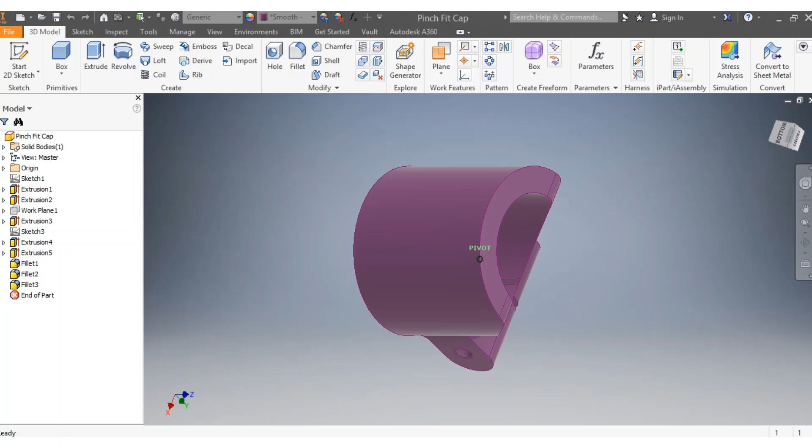We've been given this pinch fit cap to draw, and first we need to know our dimensions. Our dimensions are in millimeters, so you come back here and say new sketch, metric, standard millimeter, and then go create.

Once here, you can start by drawing your guide lines. That's my first line, which is vertical, and now I'll draw my horizontal line. I need to make sure the horizontal line is perpendicular to the vertical line, and drag it back there.

Once I have those, I'll start with the circles. I need my first circle, now my second circle. Now I add dimensions: that one needs to be 80 millimeters, and the second one needs to be 55 millimeters.

Once I have this, I'll come for the rectangle. I need my first rectangle there, and my second rectangle here.

Now I need to make sure about the dimensions of my rectangle. That one needs to be 65 millimeters. And from here up to there, that needs to be 32.5.

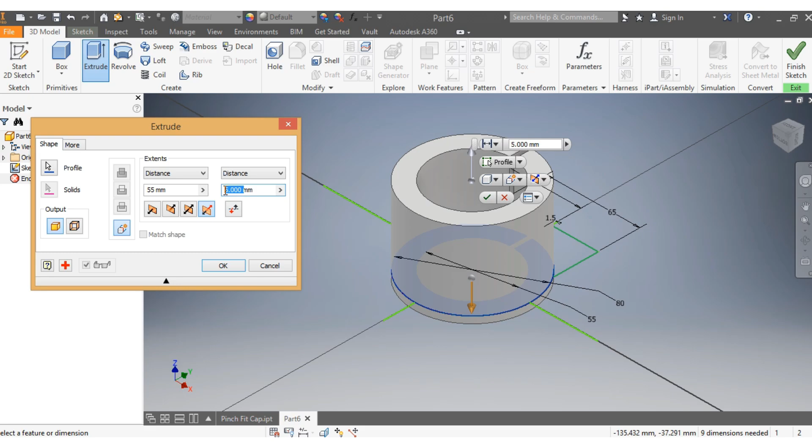So now I say extrude, I come here, and then as per my drawing, it needs to be extruded closer to me by 55 millimeters and far from me by 5 millimeters. That is correct, so I come back there and say sketch visibility on.

Once I put the visibility on, I now need to extrude. I want to extrude that spot there and the spot here by 25 millimeters, and that seems to go both sides of the center line.

Okay, which is great. So now I need to change my drawing plane. I go for the XY drawing plane, then I want it to go by 0 there. I say okay.

Then I come here and say new sketch, and again slice graphics. Once I say slice graphics, I come to the side here. So what I'm going to do now is start with a rectangle - I think that's going to be easier. So I draw a rectangle, and there it is.

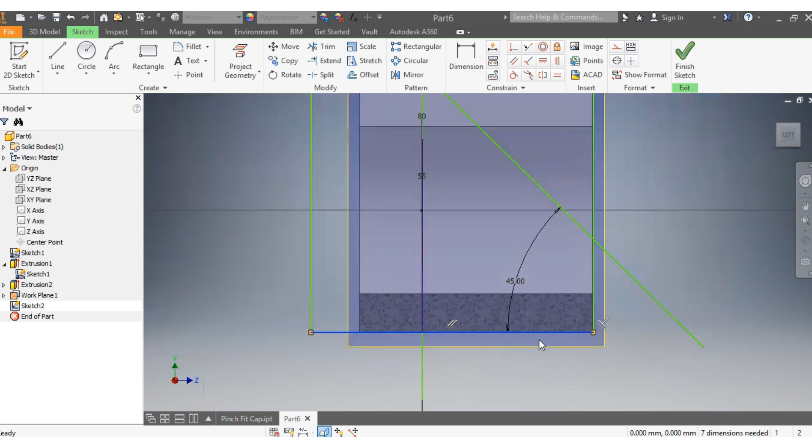That one needs to be 45 degrees, and that one needs to come there. So I come and trim this part here, trim these parts. Now I need to make sure this one there, from there up to there, needs to be 40 millimeters. So 40.

Once I have that one in place, I can come and bring this one back there, and this one as well, back here. Okay, this one back there, and this one back here. Now I can come with this other line.

So this is my line, it starts from there. It starts from here and then goes there. Once I have that one in place, I can now delete this one.

I can delete that one, I can delete this one here, and this one as well, and I can trim this part here. I can trim that part there. I can trim this part, and that part as well.

So now I can go on 3D model, and say extrude. I want to extrude this part here, that part. Let's extrude by 100. This is fine, both sides. Let's make it 200, that's safer for us. Then I want to cut it.

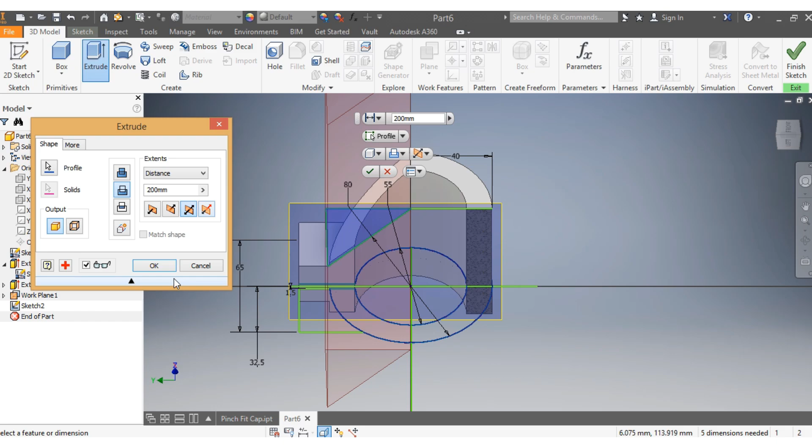So I say okay. Look how our drawing looks like now. So then I come here, and I need to have my circle.

I come here and say new sketch. So from there I start with the circle, that's why I need to start from there. That's my first circle, and that is my second circle. According to the sketch, that one needs to be 8 millimeters, 8 millimeters. And this other one needs to be 12 millimeters, 12 millimeters.

Once that is done, I go to 3D model, say extrude. I need now to extrude this part here, that part. 200 is fine. Passing through, okay, like that.

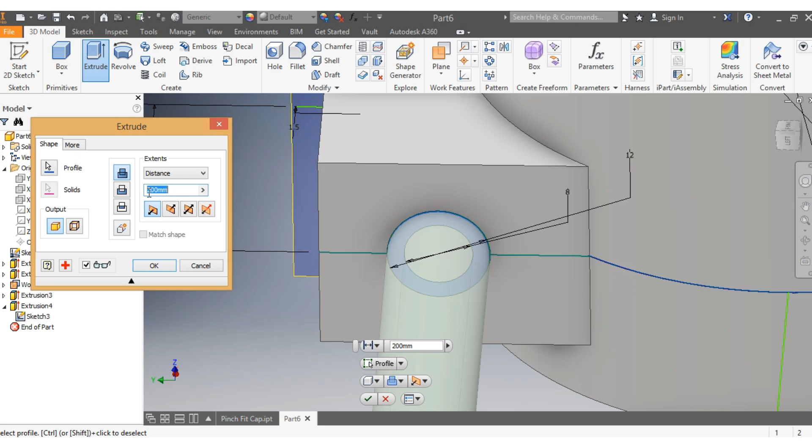I say okay. Then I come here, visibility on, visibility on. I need to extrude this part here, so I need to cut. I need to have a step there of 8 millimeters, so 8 cut inside. I say okay.

What I'm gonna do next is put the visibility off. So that one needs to be off, this one here needs to be off, the plane needs to be off, and that is great.

Now I come this side. That part there and this part here need to have a fillet, not a chamfer, a fillet of 12.5. So this part here, as well as that part, need to have a fillet of 12.5. That's great. And this one here, as well as this one here, need to have a fillet of 12 millimeters.

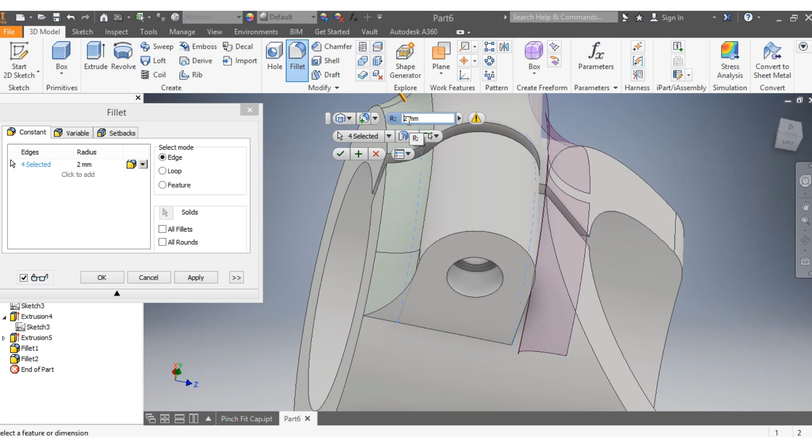So now you can see this is how it looks like. I come now to the side. I need to have a fillet there as well as there, and at the back as well. So this side as well as that side, a fillet of 2 millimeters. That's great.

Once I have that one, I think our drawing is finished. So you can see how beautiful your drawing looks like.

The next thing you can do is maybe change the material. You can put the material that you want. I can go for carbon steel. What is carbon steel? Carbon steel.

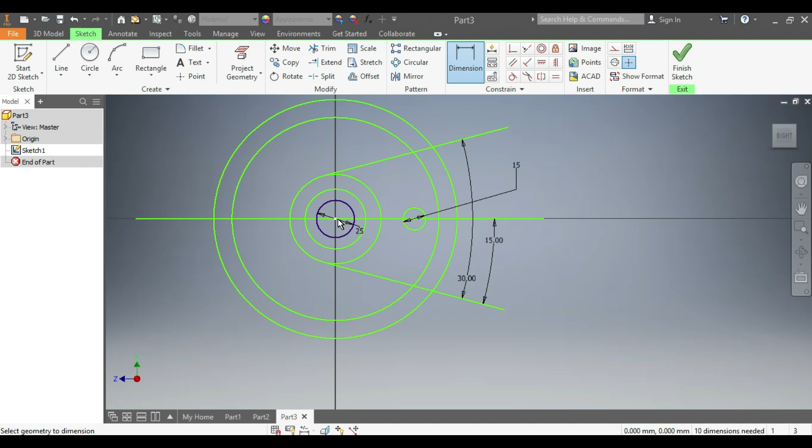So once we have those in place, what I'm gonna do now to avoid any confusion, I'll come here and delete that. You press on it, say delete, come there again, delete that one, delete this one, and then I need to make sure that from there up to there, that one needs to be 45 millimeters. And then I don't need that one as well, so I delete that one.

Then I go there, punch trim. So I trim this part here, I trim that part over there, I trim that one, I trim this one.

Once I finish with trimming, I'm gonna go into the model and say extrude. Now I need to extrude that part. That part needs to be extruded by 13 millimeters, and it needs to go the other way, the other side of my drawing plane.

So instead of punching that one, I'll punch this one here. Then I say okay. Then I come here, sketch visibility on, so I can see my drawing again on my sketch.

I go on 3D model, punch extrude. Now I want to extrude this portion the other way, plus that one as well. This one needs to go 12 millimeters. Okay, 12 millimeters, I'm happy with it. I say okay.

Then I come again, I say extrude. I need to extrude that part there by 36 millimeters. Now I need to make it visible like that. Then I say okay. Can you see that? There's your frame.

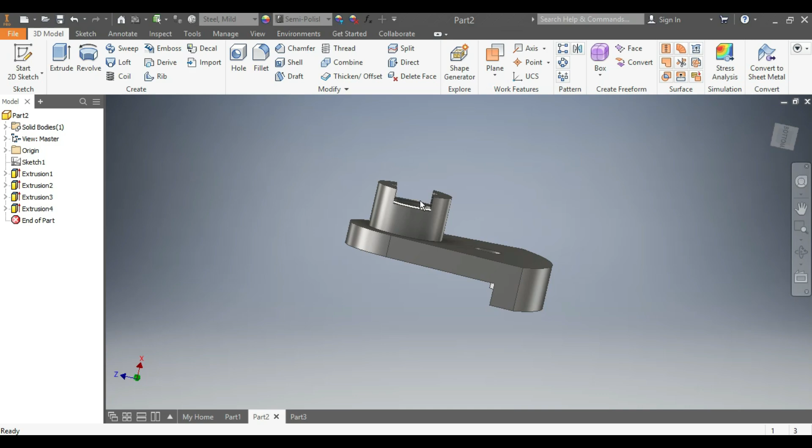So the next thing that I want is this part over here. I want these cards, do you see that? Can you see it?

So I come back here, I say sketch first, new sketch. I choose a rectangle, then I go like this. Now I want this one here to be 20 millimeters. That was close, and from there up to there, back to 0 again.

From there up to there, that one needs to be 10 millimeters. So 10 millimeters, I say okay.

Then I go on 3D model again, punch extrude. Then I want this one here to go inside now, not by 36 millimeters but by 8 millimeters. Then I say okay, now I'm satisfied with the results.

So what I want to remove now is the visibility of my sketch. I'll say visibility off, then I have my drawing. So the next thing you want now is to choose the material - I think for this one you can go with stainless steel.

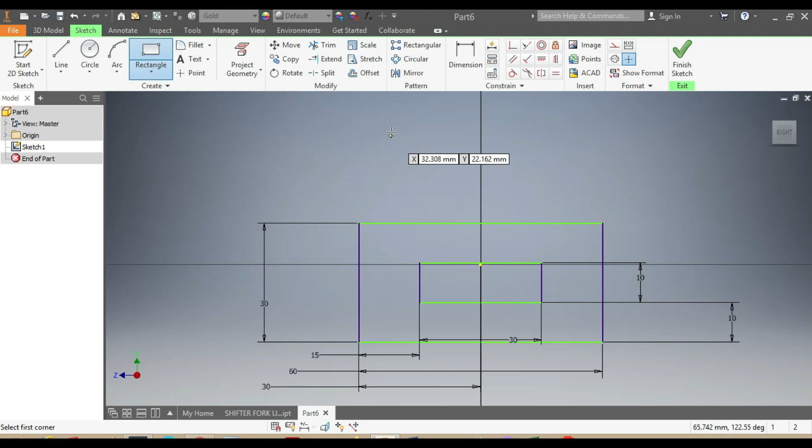Talk about this upper part, those two, right? So I'll come here, I'll draw my first leg, I can call it leg, then I'll draw my second one. Then I'll come for this small part here, the one that we're seeing here, that one.

I need to make sure that this one here is 30. And that one needs to be 10 millimeters for the thickness. And there as well, I need to have 10 millimeters. Now I need to make sure that the distance between this one and that one is 20 millimeters, which means from there up to here that needs to be 10.

So I come down here, I need to make sure that one up to there makes 15. And again from there to there needs to be half of 15, which is 7.5. So once I have my frame, what I'm gonna do is go and trim there.

I'm gonna trim this part, I don't want that part, and I don't want this part either. Once I have that done, I'm gonna go in 3D model.

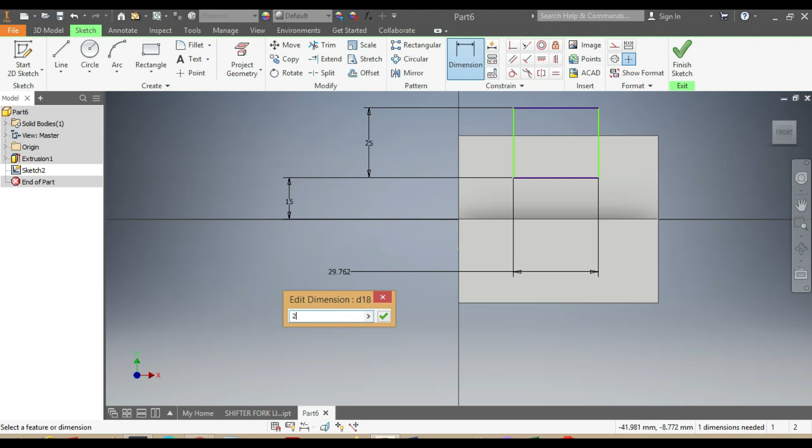At the same time, I need to make sure that from there up to there, that one needs to be 15. And this whole part here needs to be 20. Again, I need to make sure that this one is centered, as you can see here, it's centered, can you see that? Centered.

So I'll come here, I'll say from there up to here, this one needs to be 25. Then enter. Then it's at the center. Now I'll go on 3D model.

I say extrude, again I'll punch there, and I say I want to cut it. So I'm gonna cut it, and I will say 120. I want to make sure that I cover the whole length of my drawing. Now I will make sure that this one goes both sides of my drawing, so I will come there, say both sides. There we go, so there is your drawing.

You know, it looks beautiful, right? So what you want to do next now is give the material. You might go for whatever material that pleases you, but as far as I'm concerned, I'm gonna go for gold. I enjoy gold, I like gold though. I mean, it is what it is.

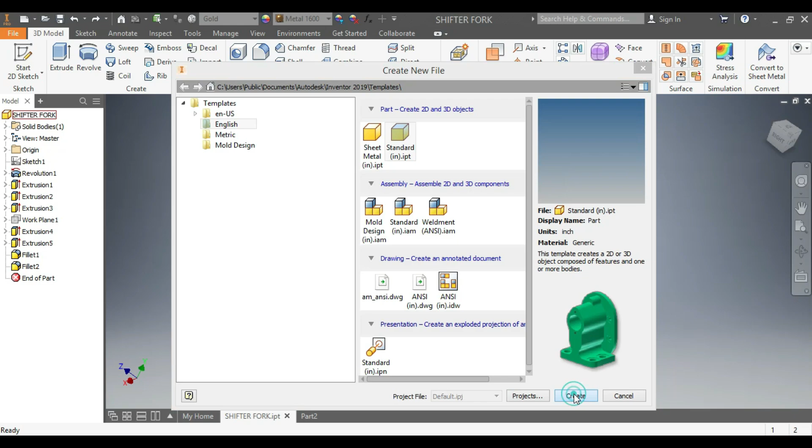Alright, our dimensions are in inches, so what I'm gonna do is go on new, come to English standard inches, and go create. Don't worry about this message, I've been going through it a lot.

Then I'm gonna start with some lines for guidance. I'll choose a drawing plane that is YZ. Once I'm in here, I'll put that one there. This is my line for guidance. I want this one here to be, let's say, 20 inches. Don't worry about those dimensions, but they're gonna help me a lot anyway.

Then I'm gonna go for the other line. Okay, that is my line. The next thing I need is this line here to be 45 degrees above this horizontal line. So that needs to be 45 degrees.

Okay, so once I have that in place, I'm gonna go for circles. That's my first one. This is my second, that's my third. Okay, and then I'm gonna come on this side as well.

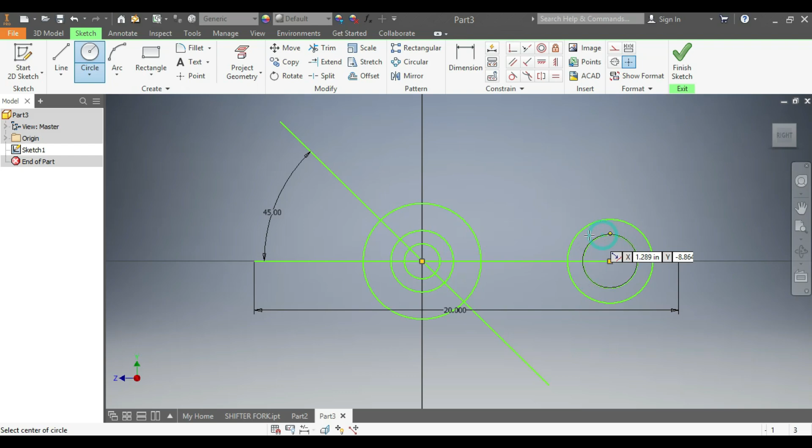So I want from here up to here to be, as per my sketch, 6.5 inches. And again I want this one here to be 2 inches. That needs to be 2 inches, and this one needs to be 1 inch.

This side as well, so that one needs to be 1 inch. The following one needs to be 1.5 inches, and the third one needs to be 3.5 inches. So after this, I'm gonna go for these lines here.

So that is my first line, and this is my second line. Okay, and now I want this line to be tangent to that one. This line needs to be tangent to that one. That needs to be tangent to that one, and those need to be tangent to that one.

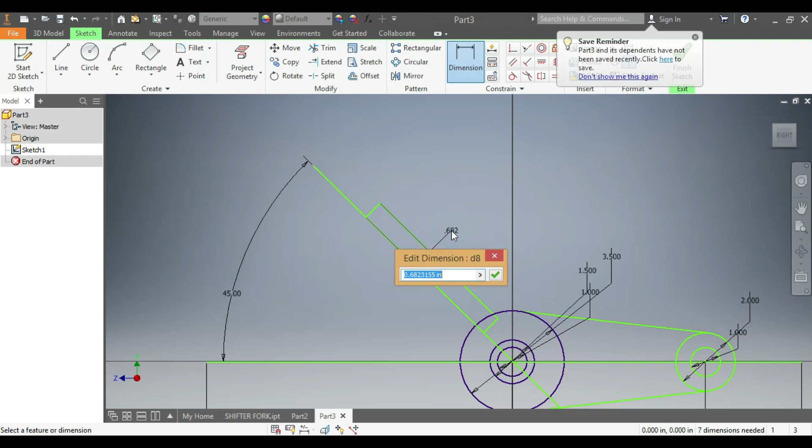Okay, once I'm satisfied with that, I'm gonna come here and choose a rectangle. So that rectangle will be fine for me. The rectangle needs to go from up to here. There is my rectangle, and I want this rectangle, from there up to there, to be 1 inch. That is 1 inch.

It's fine there, that is 1 inch, and I want now from there up to here to be 3.8 inches, as long as it's about this, the circle there with 3 inches.

That's all I want. Then I go for trim to remove all the parts that I don't need or don't want on my sketch. So I'm gonna remove that part, remove this one here, remove that one, remove that one, remove this one.

Okay, so once I'm done with those, I'm gonna go for the 3D model. I think that's it. I'm gonna go for a 3D model, I'll go with revolve. So here I want to revolve this part against this axis.

Alright, so then I say okay, then I come again and go revolve there. I say sketch visibility on. So once the visibility is on, I need to give dimensions like you can see there. So I'll come back here again, go on 3D model, and say extrude.

So I'm going to extrude this part here according to my sketch by 4, it's 4 point what, 4.5. So that needs to be 4.5, but both sides, like that, both sides of that line. Then I say okay.

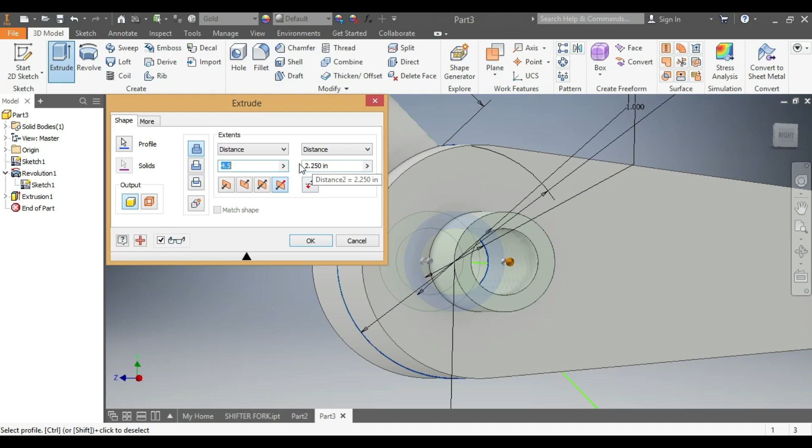So once I have that one, I'm gonna come here again and say extrude again. I'm gonna extrude this part inside here. If you see properly here, you can see that there's a step there, that step that you're seeing there. Then I'm gonna make sure I have it this side as well. So I'll come here, then that is fine with me, but this side is the one that I need to work on. So there, come on, that one needs to be 1.65. Okay, that's it.

Yeah, 65, that's all I needed. Then I say okay, like that. All right, the next step, I'm gonna come up here, check here, come there, click on it, and say new sketch.

Once I'm here, I'll draw a rectangle. So there is my rectangle. I want this rectangle to come like this. This one here needs to be 2 inches, to avoid confusion, and from there up to there needs to be 1 inch. Okay, I think something moved there, but it's not a big issue, so that is fine with me.

Then I'll come here and draw this rectangle. As per this rectangle, that needs to be 1 inch, and from there up to there it needs to be 0.5 inch. Once I'm satisfied with that, I'm gonna trim the spot here, that and that, this and that. I can just delete that one.

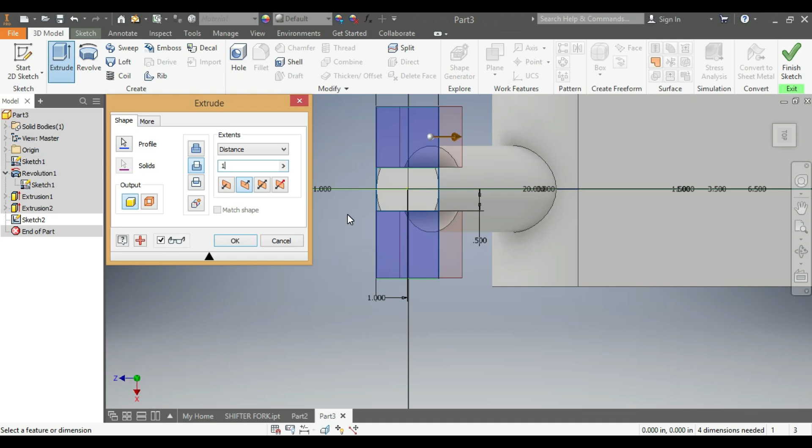Then I'm gonna go for a 3D model, say extrude. I want to cut the spot here and that spot there so it can go down. By what, according to my sketch... 0.75. Okay, no, I made a mistake, that's not 0.7, it needs to be 1.5. Sorry, 1.5. All right, then I say okay, so that is done there.

The next thing that I need is this spot here. So I'm gonna come back here. No, this needs to be done on which plane? So it's xz, sorry. I'm gonna click on xz there, then go on plane. I try to punch it, but I want it to be at 0.0, so it needs to go back there.

I say okay, then come there by the corner. I say new sketch. Once it gives me that, I come by the corner again and say slash graphic, slash graphic. Once I have that one there, I'm gonna start with this, so I'm gonna draw this rectangle here. Doesn't matter how far it can go, but this one here needs to be...

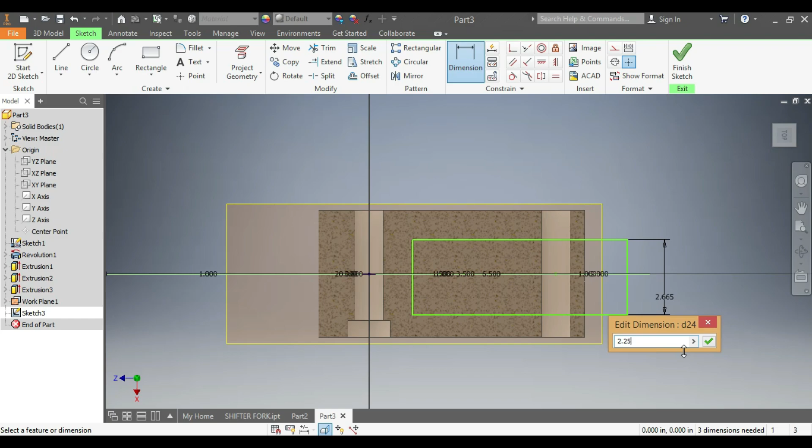2.25, okay, sorry for that. So 2.25, which means, sorry for that, from there up to there that needs to be 1.25 - was it 1.25 or 1.75? Yeah, 1.75, that's the correct answer.

So 1.75, and now according to my drawing, from that spot to there that needs to be 2.5. Okay, that needs to be 2.5. And I'm gonna go and do this - I go there, then I come here. So that's great, I go for escape, and then I trim this spot here. So I'm done with that.

Then I'm gonna say 3D model, extrude. I need to extrude this part here. There we go, check here, like that. So I'm gonna go cut it. I can go as far as I want, I can go with 6 inches, but I need it to go not only on one side but this side as well, so I'm gonna say up and down. Then I say okay. So once that is done, you can see now how my drawing looks like.

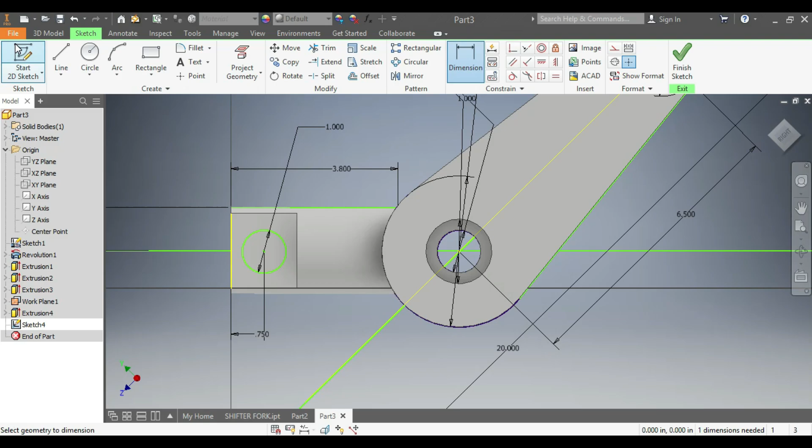Okay, so now I need to come here. I can come here and say new sketch. Once I'm there, I'm gonna go for the circle, and the circle here needs to be 1 inch - sorry, the diameter needs to be 1 inch, right? And from there up to there, that needs to be 0.75. All right, then I go on 3D model and say extrude.

I'm gonna cut that spot there, 6 inches is fine for me, so both sides like that. Then I say okay. All right, then I'll come here to make my drawing look beautiful. I'm gonna say visibility removed, and I want to remove that drawing plane. Then I'll say visibility off.

Okay, so once that is done, I'm gonna kill the corners. First I'll start here, click there, then click on the fillet. That's fine for me, 0.125 inches. I'll say apply - okay, it's applied there already.

Then I'll select that one, press Control, select spot. I'll try to turn my drawing, select that spot, select this spot as well, turn it again, select that spot, select that spot, select this spot, and then turn it, select this spot here. Then I click on the fillet, 0.125, fine with me.

Great, so now check out how your drawing looks like. Everything is there, all the parts. So the next thing that I want now is to give it the material. Just the same. You just made your shifter fork, right? So now let's give it the material.

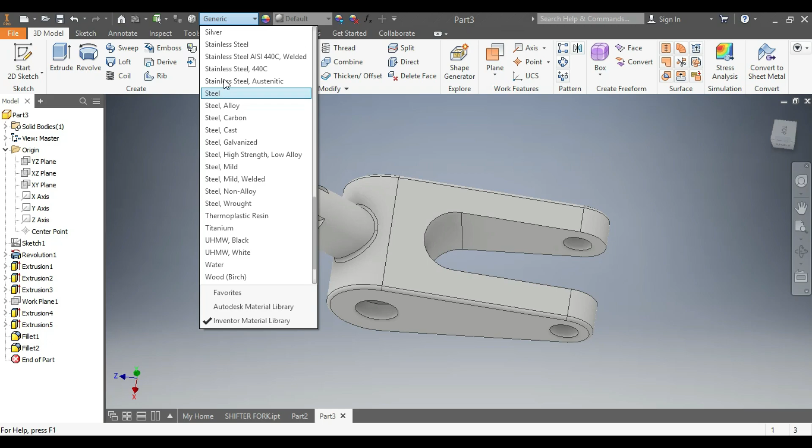So for this one, I'm a fan of gold, so I think I'm gonna go with gold. Where's gold here? Actually, you can go with stainless steel. Let's go for stainless steel. Where's stainless steel here? Steel, stainless steel. Yeah, that's beautiful though. That's also fine, but let's give it something expensive.

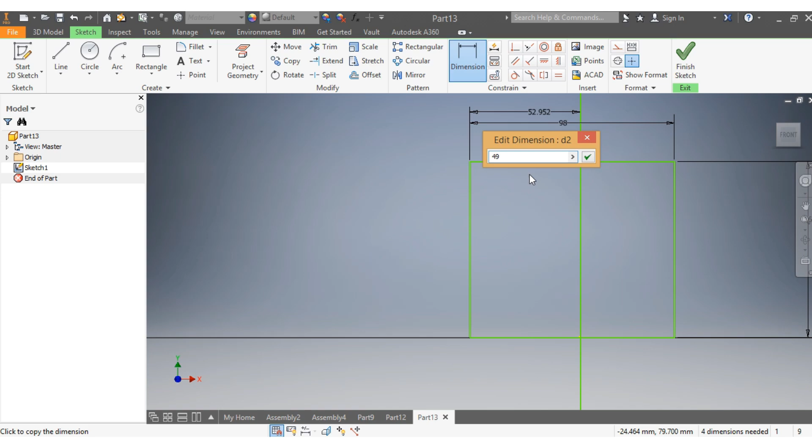I'm gonna put that line back there, right? So we go saving this together, we are in this together. So now what I'm gonna do is draw this line. So there is my line. And I need to make sure now that from here to there, that one needs to be 49 millimeters, to make a diameter of 98.

And from here to there, that one needs to be 3 millimeters. So that is 3 millimeters. And I need to draw that part. So that part, from here to there, crossing through, that one needs to be 42 millimeters. So 42 millimeters. So that is done.

So now I'm gonna have to draw my line. So this is my line, that is my line. And this line of mine, from here to there, needs to be 20 millimeters. So that needs to be 20 millimeters.

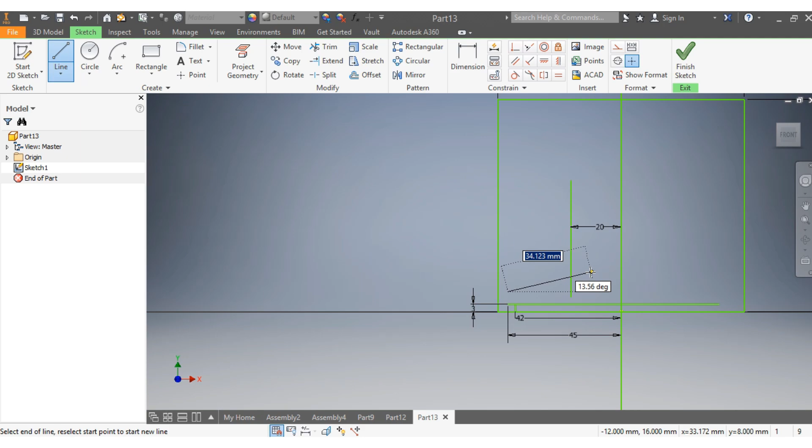And now what I'm gonna do next is I need to draw this line. And this line here, now I need to make it longer. So there's my line. So this line of mine, from here to there, let me just trim it, I'm going to trim that part. So now from here to there, that one needs to be 16 and a half millimeters. 16 and a half, great.

And this needs to be parallel to that. Great, it is parallel. And now from here to there, that one needs to be 100 degrees. 100 degrees, thank you. And I need now to join this part. So I need to join that part. Okay, great, it is joined.

So I need to trim that part, I need to trim this part, I need to trim this part as well, I need to trim that as well. So what I need now, you can see, this angle there is 80 degrees and this one is 100 degrees. So now I need to make sure about the dimension of that. This one needs to be 34 millimeters. 34 millimeters, so that is done.

All right, now I'm gonna draw this line of mine. So there is my line. And now I need to make sure that from here to there, that needs to be 65 millimeters. So that needs to be, what did I say?

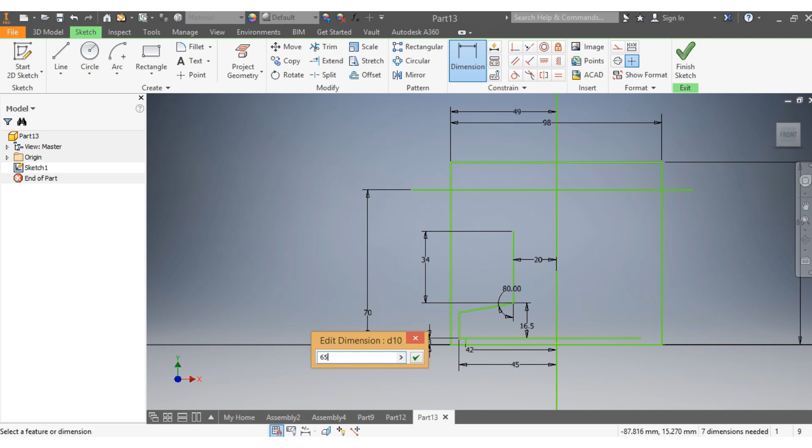From the to the, that needs to be 65 millimeters. Thank you. And then I have to make this line here. That is the line that you're seeing there, the axis of the hole.

And now from there to here, that one needs to be 35 millimeters. So that needs to be 35 millimeters.

So that is done. Now what I'm gonna do next is I'm gonna have to draw another line here. So there is my line.

And now from this line to there, that one needs to be 39 millimeters. So that one needs to be 39 millimeters.

Thank you. Once that is done, what I'm gonna do is I'm gonna trim this part. I'm gonna trim that part.

After trimming that part, I need to make sure now that I draw just a line there. This line is for guidance, and I want from there to that line to be 8 millimeters. So that is 8 millimeters.

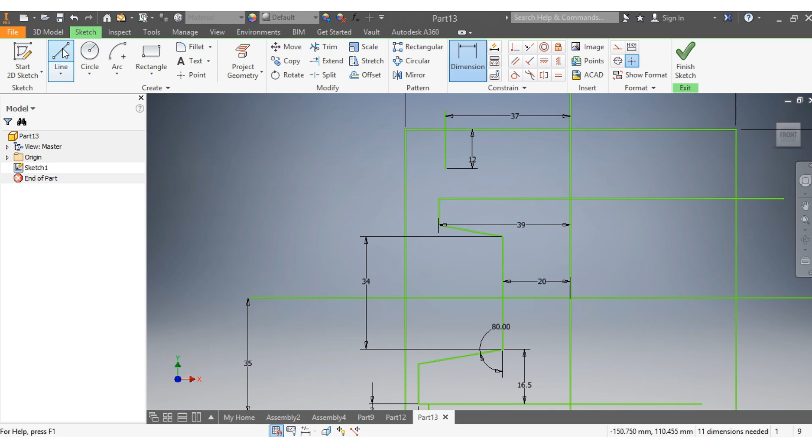And now from there to be 12, so that is 12. Great. Under ones now, we have a line here.

How can I do this? So if I take from here to there, under ones now, from there I want to the spots.

Okay, so I want from there to be 8 millimeters. So that's why I need to be 8 millimeters. I need to drag this one back there. Thank you. Come on.

So once that is done, what I'm gonna do next is I'm gonna have to get this spot here. So first, I'm gonna draw a line. That is my line, and I need to make sure that this line is 2 millimeters from the side. That needs to be 2 millimeters from the side, and I'm gonna have to draw this square.

So then these are the ones for the grooves. You can see here I'm having the grooves there. Okay, so I need to have those grooves there.

And from there to there, that needs to be 2 millimeters. That is 2 millimeters. My second, my third, there we go. So from there to there I need to have 3 millimeters, which is 3 millimeters. From there to there I need to have 2 millimeters, so that is now 2 millimeters.

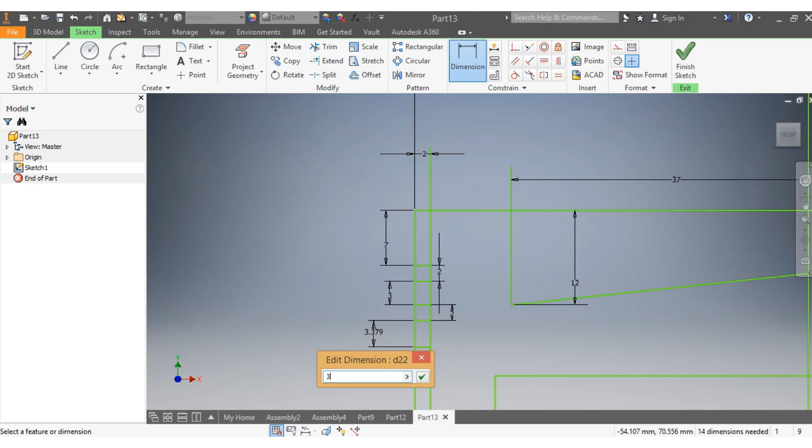I need to have 2 millimeters, and then from here to there I need to have 3 millimeters, so that needs to be 3 millimeters, and then from here to there I need to have 3 millimeters as well, which is 3 millimeters. I don't want that line.

I'm gonna delete it, and I'm gonna trim this part. I'm gonna trim dots, trim dots, trim that. All right, escape. I don't want you, sorry.

So that is done. I'm gonna trim this part as well. So that is done. So I have the inside parts, so now I'm gonna delete that. That is deleted.

I'm gonna trim 1, 2, 3, 4. Trim that one as well. I'm gonna delete this one.

So now what I'm gonna do next is I'm gonna go in 3D dimensions, 3D model. Then I'm gonna have to revolve that function. So I'm gonna revolve that function. Revolve against this axis. Okay, thank you.

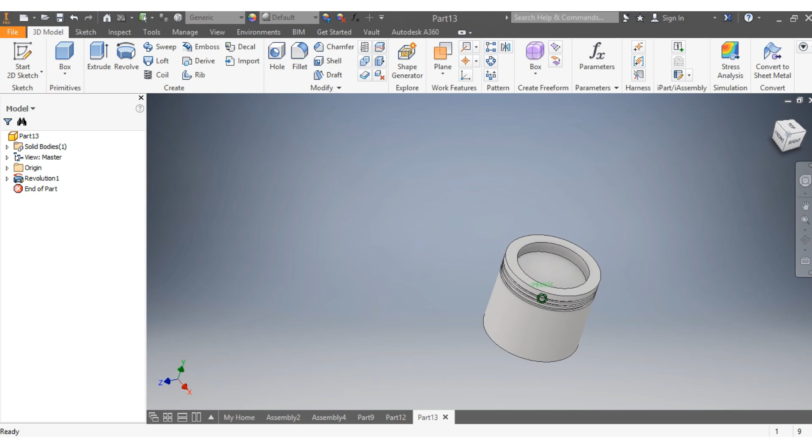So once I have that, all right, you can see what I have now. So the next thing that I'm gonna do now is to change the origin. So I'm gonna go on XY, which is great, right? XY. Then I'm gonna have, come on.

Then I'm gonna draw there, set it to 0. New sketch. I'm gonna slice it, slice graphics. Now what I'm gonna do is draw my hole. You can see I need this hole here. So I come here, draw that spot, then draw my hole. So there is my hole.

I need to make sure that my hole is 35 millimeters from the bottom, and it needs to have a diameter of 23 millimeters. So that needs to be 35 millimeters from the bottom, and that needs to be 23 millimeters. Once that's done, I'm gonna delete that one, I don't need that. Finish sketch.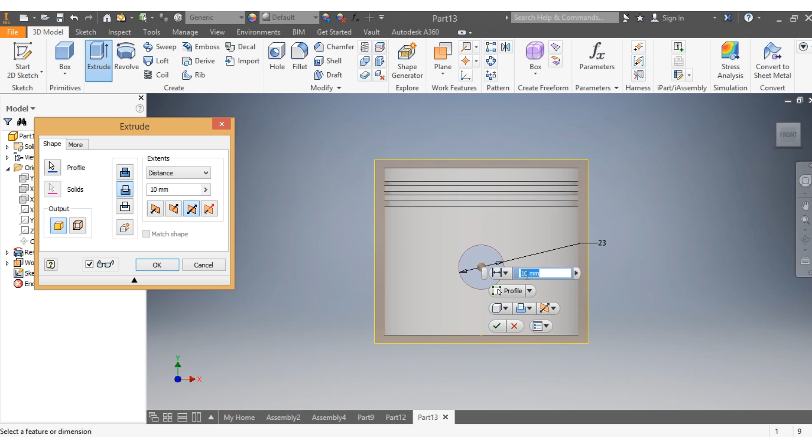The next thing is I'm gonna have to make a holding. So I need to have a holding, passing through, that's where I need to go. Let's see, 120 millimeters, so like that.

Thank you. So the next thing that I need now is the top parts. You can see these top parts, I need to have those. So I come here, what I'm gonna do is change the plane, to the XZ plane.

When I come there, I want it to go up by 86 millimeters. So 86 millimeter. Thank you. Then I'm gonna have to draw on it. So new sketch.

So now what I'm gonna do is have this line, my first line, my second line. I want this line to pass through the center, and I want this line to be perpendicular to that one. The reason being, let me check. Okay, I got it right.

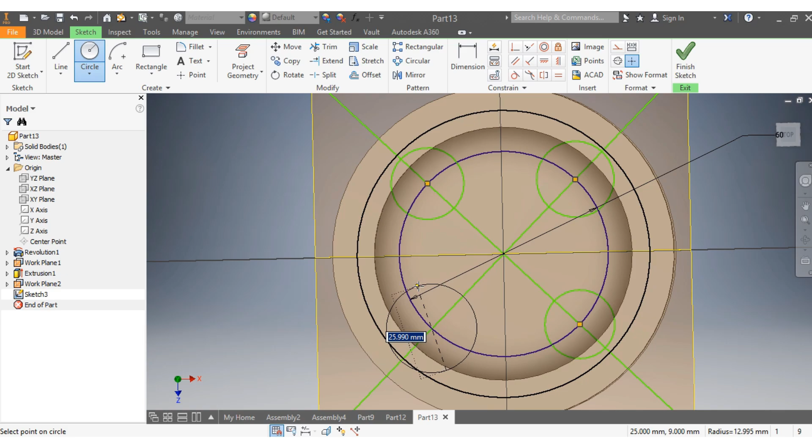So my first, my third, that's my third, yeah, that's my fourth. And I need to make sure that these ones are 30 millimeters each. So that needs to be 30 millimeters, this one needs to be the same 30 millimeter, that needs to be the same. 30 millimeter, that's going to be 30 millimeter, and this one as well needs to be 30 millimeters. As we're conceiving, so be patient. So 30 millimeters, that is done.

I don't want that, I don't want that. So I'm gonna come here, I go on extrude. I want 1, 2, 3, 4 to be cut by 4 millimeters. So 4 millimeters, thank you.

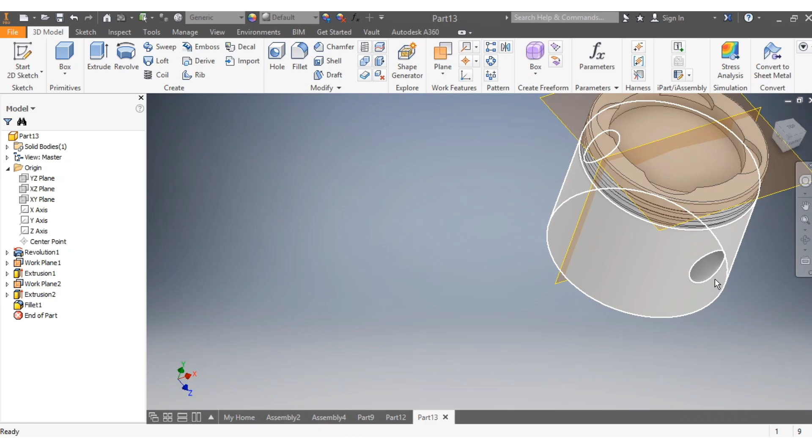Great, that is so great. So then what I'm gonna need next is a fillet of 1 millimeter. So put it 1 millimeter, then have a fillet here of 1 millimeter, 1 millimeter there as well, 1 millimeter there as well. A fillet of 1 millimeter here, 1 millimeter as well. So here is how your drawing looks like.

So I'm gonna have now to remove the plane, remove this one. Visibility removed, this one, visibility removed. So the visibility is removed. Let me show you how it looks like. First of all, I'm gonna change the material, let's put aluminium because this needs to be in aluminium, so that it does the job perfectly better. So here you can see how your piston looks like.

So it's well conceived. So what I'm gonna do next is show you how this one looks like if you have to cut it. So let's go to the drawing plane, that one, how does it look like? Okay, so if I put it at 0, I want to show you the inside. So now I come here.

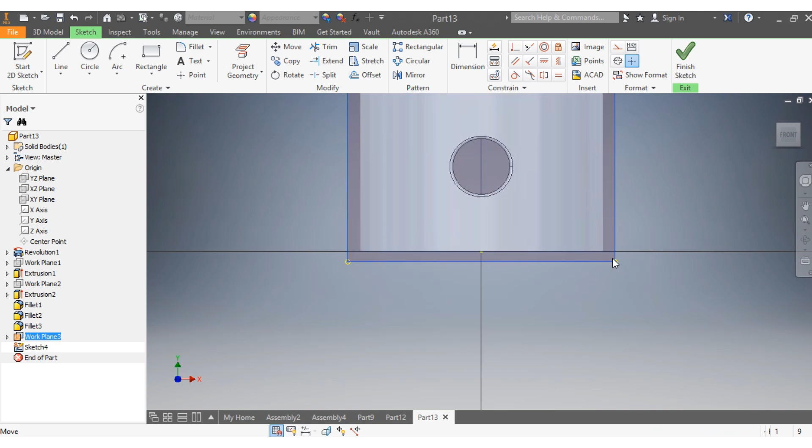New sketch, check how the inside looks like. So this is how the inside looks like, right? This is how the inside looks like. It is not beautiful, it's not beautiful.

So if I want to cut using YZ, check now how the inside looks like. Put it as 0, right? Put it as 0, great. And let me move it. New sketch. Slice graphic. So this looks just as this one would look, this is how this one will look. Slice graphic.

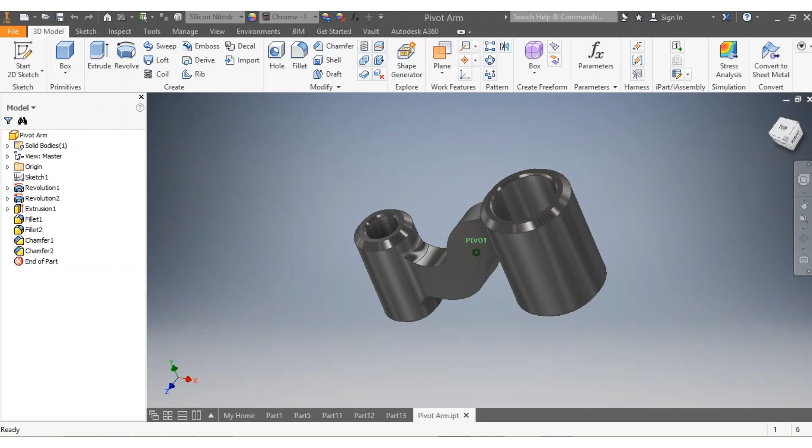Hey there. So we have to create this pivot arm with dimensions in millimeters. Here is how it looks like, and these are the dimensions, as you can see, in millimeters. So let's start the drawing. The way to do it is you say new sketch, standard millimeter, and then start from there.

So here you come up with the rectangles. That's my first one, and this one here needs to have dimensions as indicated on the sketch. That one needs to be 100, and you need to have 55.

Again, you need to have the center line. There is my center line, and I have to make sure this one here is parallel to that one. So you need to make sure about that. That one needs to be 27.5.

So you come here, you draw the center line. There is my other line. Again, this one needs to be parallel to that one. It is parallel now, and from D to D, that one needs to be 15 millimeters.

So once we get that one there, we come here for the other rectangle. This one here, from V up to V, needs to be 75 millimeters. And here I need to have 85 millimeters, and here I need to have 115.

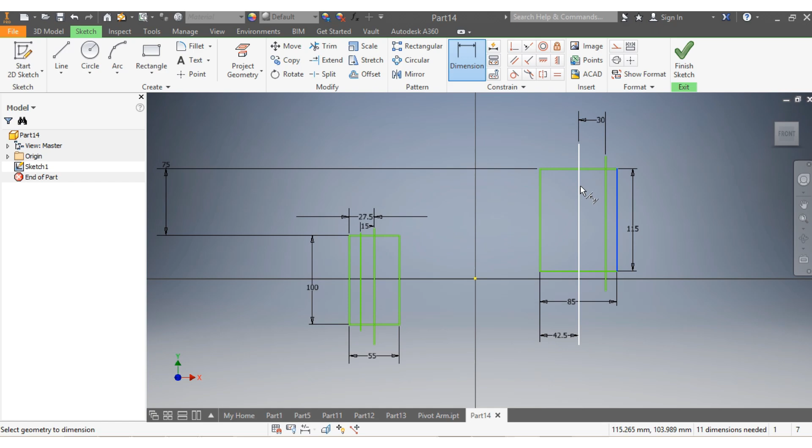Once I get this one done, I need to come now for the hole. So I need to have a hole here, and this one needs to be from D up to V, that need to be 30. And from that, that's already done, and I can trim that part. I don't need those parts there.

So now I have to come with the circles. That's my first, that's my second, and those ones here, this one needs to be 70. Okay, this needs to be 70, and thus need to be equal to that. And this one here needs to be escape, need to be 150.

150, great, as well as that one, 150. Once I have that one written there, again, from there up to there, I need to have 5 millimeters. That needs to be 5 millimeters.

And now from the center up to there, that needs to be 44.92. I come here now. Now from here up to there, that one needs to be 14.417.

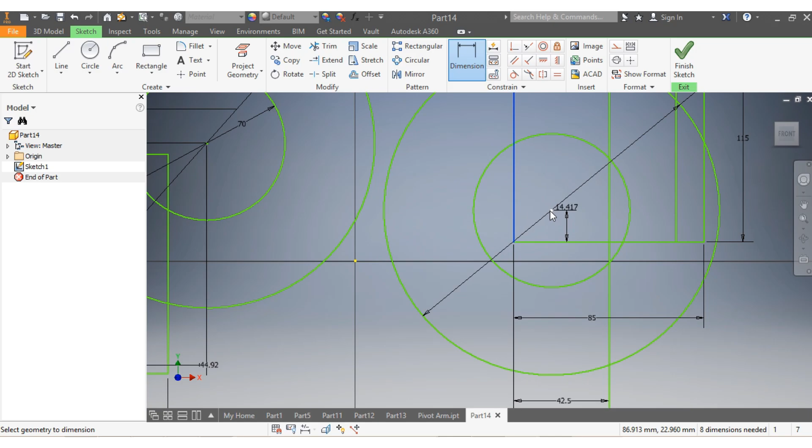And now from there up to there, that needs to be 8.04. That's great. So now I need to make sure about this dimension, now from there up to there, that one needs to be 185 as per our drawing.

Okay, so once I have those ones in place, what I need to do now, I need to draw this line here, I need to draw the circle here. So there is my circle. I need to have a circle here. Alright, there it is, and this one here needs to be 12 millimeter for the diameter.

That needs to be 12 millimeter. And here from there up to there, that one needs to be 60. Great. So once I have those ones in place, now I need to make sure about this.

So I need to cut with this line, you know why, so I have that line there. So I come here and I trim that spot and this spot. Again, this one as well, so I need to cut it there.

Alright, I need to make sure first that this one is parallel to that. And I need to cut there. So I don't need that, and I don't need this one. So once I have those, I need to remove this spot here.

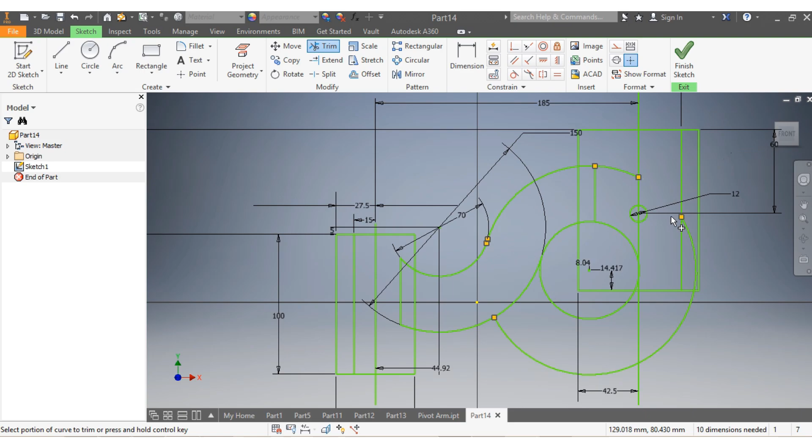So I need to trim that part, I need to trim this part, I need to trim that part, I need to trim this part as well, I need to trim that part, that one, this one, and that one, here and there.

Again, I need to delete that one, I need to delete that one. I come here, I need to delete the spot here. Then I have to trim that one, and that one. Right, come on, why not going? So let me go back. Let me delete this part here.

Alright, sometimes that's what can give confusion, you see. No big deal, no big deal, we can still draw this part. So I trim this part and that part, I trim that one and that one. So once we have this one done, once we have that one done - no, we need to remove it. So once we have that one done, I come here, I say 3D model.

Then I say revolve. So I want now to revolve this part against this axis. And I say revolve.

Then I come here, I say visibility. So I come here, then I want to extrude this part. That's the hole there - where's the hole? This is the hole. I want to revolve, I want to extrude the hole.

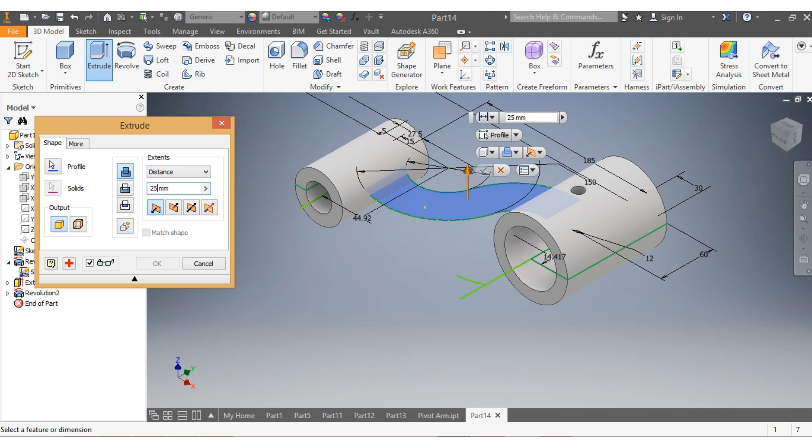So by 50 millimeters, by 50 millimeters this side. So again, I say extrude. So I want to extrude this part against this axis. I say okay. Again I say, oh, that was revolved. I say extrude, I want to extrude this part against - no, that's to extrude it. So by 25 millimeters, by 25 millimeters to 5, both sides, like that.

I say okay. So once that is done, you can see now this is how my sample looks like. So now I have to cut the corner.

So this one and that one need to have a fillet, okay, and this side and that one, they need to have a fillet of 6 millimeter radius, as indicated on the drawing. That's 6 millimeter radius.

And while we're waiting for this, inside there we need to have a fillet of 2 millimeter radius. So here, that side and that side, again this side and the side, we need to have a fillet of 2 millimeter radius.

That's great. So now we come here, so you see that we're getting there. This is a pivot arm.

So we come here, that's one and this one, and that's one and this one. Come on, move. And this one and this one need to have a radius of 12 millimeter, a fillet of 12 millimeter radius.

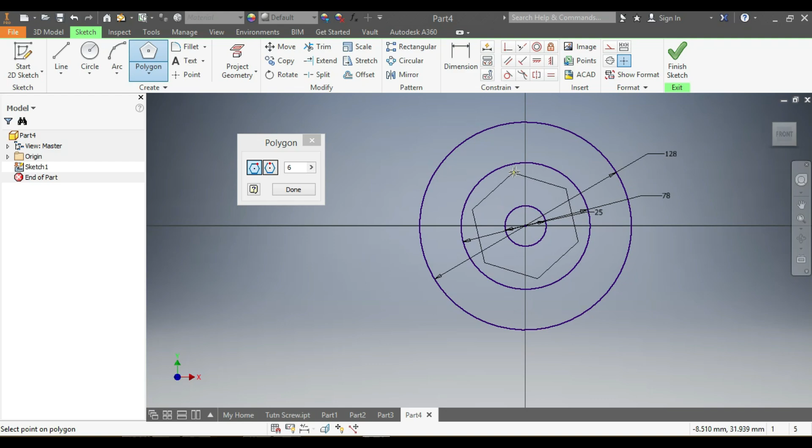Once I have those, I'm gonna go for my hexagon, since I need to have 6 circles there with the same space between them, so I need to make sure that I get this done quickly.

Once I have my hexagon there, then I'm gonna start by placing the circles. So that is my first one. There are two, those are my first ones. These are my second ones.

Third ones, I come here, fourth ones, fifth ones, and this is my sixth ones.

So the next thing that I need to do is to give dimensions. That one over there needs to be 27 millimeters. And this one here needs to be 15 millimeters.

Once I have those in place, I'm gonna go there and press on equal. I want this one to be equal to that one, I want that one to be equal to this one, I want this one to be equal to this one, and the next thing is I want that one to be equal also.

My reference one is this one here, so I want this one here to be equal to that one, I want this one to be equal to this one here. I want this one here to be equal to that, I want that one to be equal to this, and I want this to be equal to that.

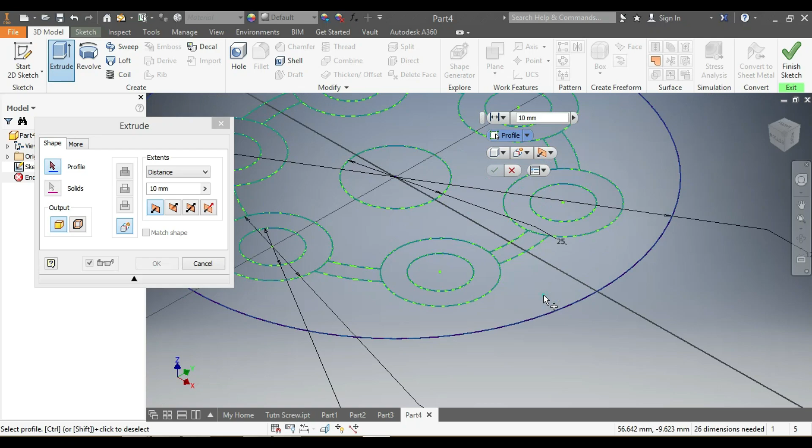So I want to extrude this part here. I'm gonna start by this part. I want to extrude this part here by 7 millimeters, as well as that one.

They need to go together by 7 millimeters, so those ones need to be extruded by 7 millimeters. Okay, so that's one in place.

I say okay, and then the next thing I want to do is turn sketch visibility on. I right click, say visibility on, then I turn my sketch, come on extrude again. I need to get this part here out.

That's one there, this one there, that one here, this one, that one, and that one. Those ones need to be extruded by 37 millimeters, so I make sure that it is extruded by 37 millimeters, okay, the way it is there.

Then I say okay, and the next thing I need now is for these ones here to be taken out, this part here. So I come on extrude again, and I make sure that I'm selecting the right part. I select that part over there, this part over there, that part, this one as well, that one, and then this one.

Once that is in place, once I've selected those ones, then I need to give them dimensions. So those ones need to be 25 millimeters, they need to be extruded by 25 millimeters.

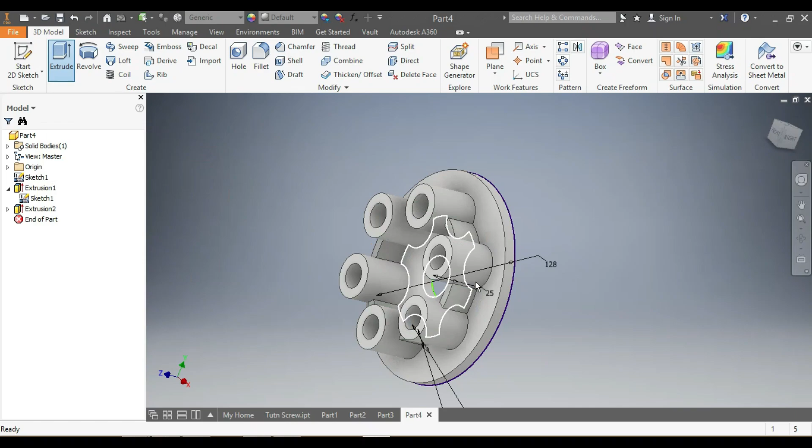That's correct. So now I need to take this part out, sorry, this part needs to be taken out. So now I turn it, then I say extrude, and I select the part, which is this one here. Then it needs to be extruded with 15 millimeters.

So now your drawing is done, but you need now to kill the corners. So I need to kill that one over there. What I'm gonna do is click on the corner. First, let me remove the visibility. I come on visibility, say visibility off, and then I select the corner, my first corner, then I select all of them at once.

So this one as well, let me turn it properly. So this one here, once that's one done, I come here and select that part, that one, this one, that one, that one, this one, this one, that one, this one here, the one over there, this one, that one.

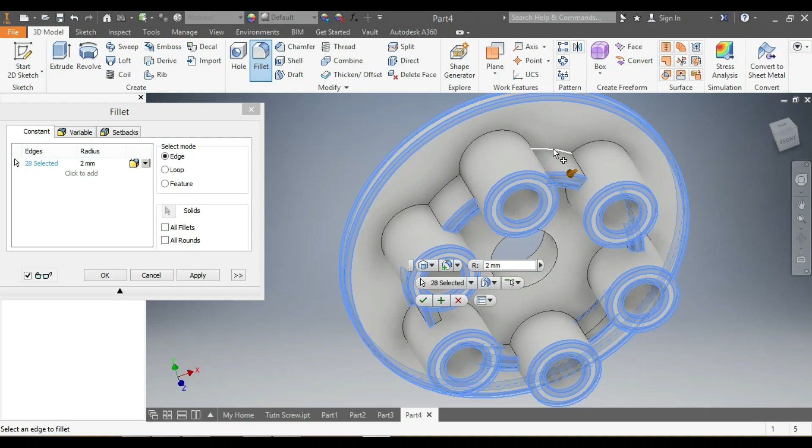So I need to make sure that all the corners are killed. So this one here, that one, that one, this one, that one, that one, and what next? So this one and that one and that one and that one and that one, the outside ones, those are the ones that I want to kill. That one, and this one. So now that all the corners are killed, all the outside corners are killed, so that's correct.

And then I see, no, I need to kill it with 1mm radius, 1.5mm radius, like that, I say okay. So now give it a moment for it to operate.

So that's correct. Now that everything is done, I need to choose the material. So this one here needs to be cast iron, gray cast iron, I come there, and then I go for iron gray. So there is your pressure plate. Do you see how beautiful it looks? This is what we did.

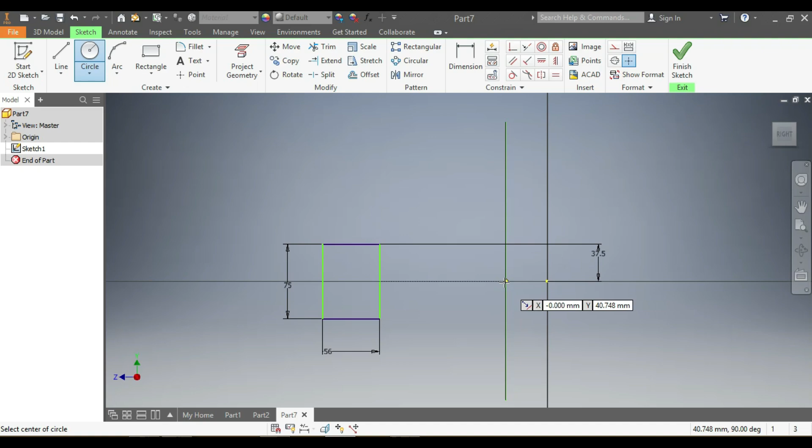That is my first circle. Then comes my second, comes my third. Here again, almost there - first, second, and third. I come here again - first, second, and third. So then what I need to make sure about is this dimension.

From the top to here needs to be 128. Okay, great. And again from the top to here, I need that one to be 130. I got it right. So don't worry about the way it looks there - we're gonna get it fine now.

And then I need that one from the top to here to be half of 130, which is 65. That's good now. So I need to give dimension - this one here needs to be 48, and then the second one needs to be 36. The third one needs to be 18.

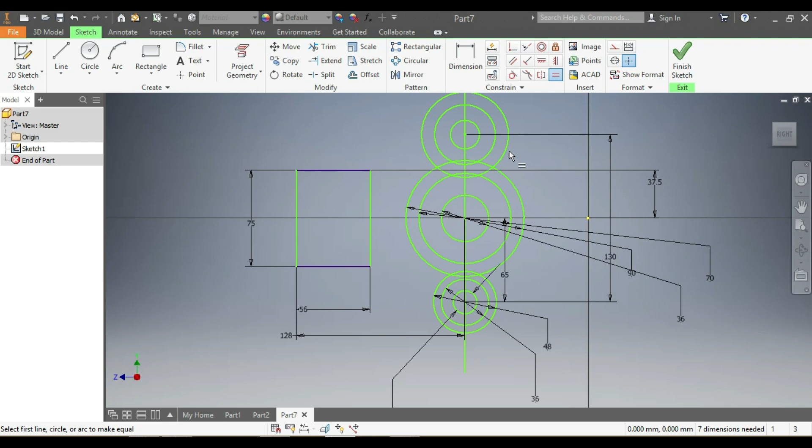I need to make sure that this small one here needs to be equal to that big one. You can see I can't see properly which one is which, but I'm gonna try my chance - it's gonna tell me anyway. I want this one to be equal to that one. I got it right.

So once I have those in place, I'm gonna go for this line - there's my first line. Then I'm gonna go for my second and third line, different places. Now I need to make sure this line here is tangent to that circle, right? We are saying it is tangent, which is great. This one here needs to be tangent to this circle.

I hope it is tangent as well. So that is tangent already. Thank you. And that line needs to be tangent to that circle. It is. Now this one needs to be tangent to that circle. Okay, cool. So now that I have everything in place, I'm gonna have to trim everything that I don't need.

I'm gonna go and trim there. I don't need that spot there, so I'm gonna trim that spot. I'm gonna trim this spot. I'm gonna trim that spot. I'm gonna trim that spot as well.

Okay, I come here again - I trim that spot, I trim this spot, I trim this spot, I trim that spot, I don't need it. Here again, I trim this spot, I trim that spot, I trim the spot because I don't need it. I trim that one, I trim that.

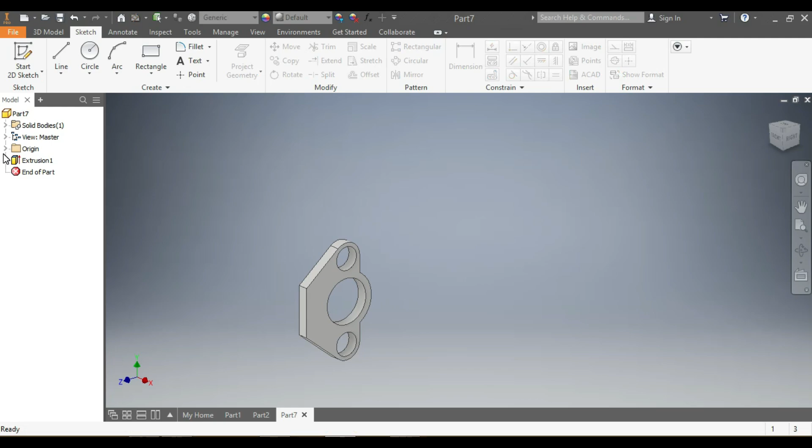I need to see my drawing, so I need to see my sketch. I go on visibility, I punch visibility. I go on 3D model again, I punch extrude. So I come here, I choose that one, I choose that one as well. Both of them need to go up by 19.

Okay, can you see there? Where is it? Can you see that one there? Can you see here? So that needs to be 19. So I come back here. I say 19, 19, okay. So I need to have this kind of a tower there.

So that one needs to go up by - come on, sorry, I punched wrong there. So extrude again. That one needs to go up by 119. 119. That's what I need to go up by, 119. There you can see it.

So I say okay. Again, I need this spot here to go up by what? 56. So 56. Okay. So now check out how your drawing looks like.

Another thing that you need to do, you just need to make sure about the dimension from there to there. Anyway, you could have done it before, but we're gonna see how we're gonna deal with that one.

Now I'm gonna have to draw something that is missing so far. So I'm gonna put a fillet here. I come here, I choose that one. I want a fillet of what? It needs to be 28, so 28 millimeters. I say okay. That side as well, 28 millimeter. Yes, I go apply.

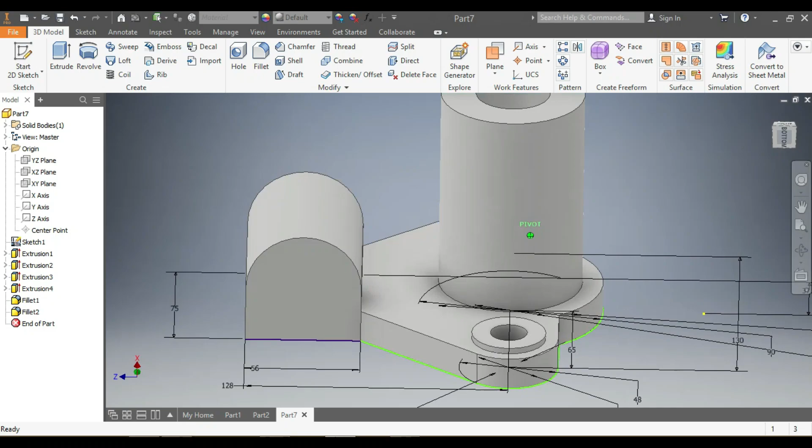Okay, so I go apply. So now there's something that I need that is missing there. So then I'm gonna have to choose my drawing plane. I'm gonna go for, where is it? I say new drawing. Here I'm gonna go for my rectangle.

So my rectangle needs to start, let's say, from there. Okay, from there and then up to there. All right, up to there. So then what I'm gonna do is I'm gonna draw this line here. This line needs to start from there. Okay, from there up to, let's say, up to there.

And I want now this line here to be tangent to that. So it is tangent now. So then I'm gonna go for 3D model. I say extrude. Then I come to the spot here. I choose that spot. I want it to go by 12 millimeters. So 12 millimeter. Let's see. Okay, 12 millimeter both sides of the plane. That is great. Then I say okay.

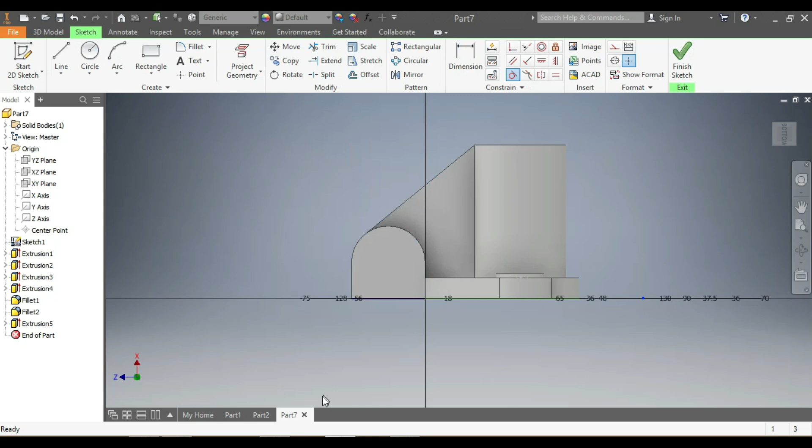All right, so there is my drawing. Another thing that I need now, I need to make a new sketch here. That new sketch is for that hole that you see there. So I come here, let me bring it closer. I go with a circle, and then the circle needs to be there.

I need to make sure about border size. So this one here needs to be 28, sorry, that needs to be 28 millimeter. Great. And from there up to there, that needs to be 28 as well. And from there up to there, that needs to be 28 as well. So that is 28. Great.

So I go 3D model, extrude, I click on my circle, okay. Then let's say that I want it to go both sides, right? So that is bigger. So let's make it 100. You see, 100 both sides. 100 is too small. 900. Great, both sides. Then I say cut. You can see that for cutting.

Yeah, okay. So there is my hole there. You can see there is a hole there, my sample. So again, I'm gonna come this side here, right? I'm gonna choose my drawing plane. So what drawing plane stands there? Let's see, it's XZ, right? No, it's not XZ. No, so it's YZ. So I go there, I say new sketch YZ.

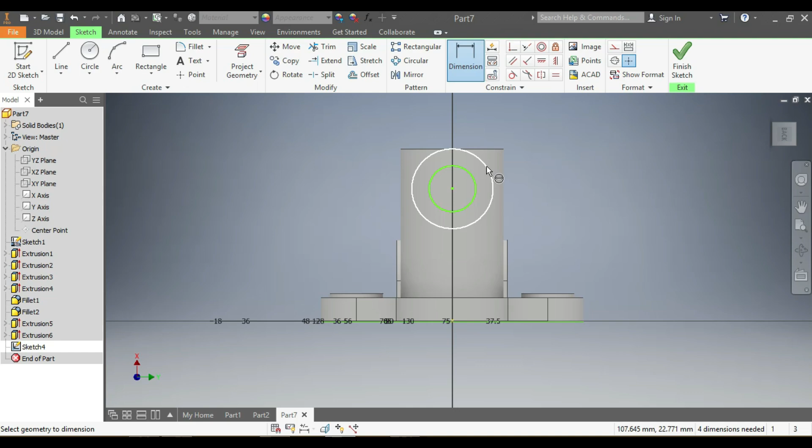Exactly. Then here comes my two circles. My first one, my second one, and as per the drawing, this one here needs to be 48. So one needs to be 48, okay, and the other one needs to be 25. That's one needs to be 25. And that circle, I mean that center, needs to be 89 millimeter away from the bottom. Then I say okay.

So once that one is placed, what you're gonna do now is you go into the model, you go extrude. So you want this one here to go inside it. Not like that though, but let's put 100. You see 100? Okay, how's 100 doing? That is too much. We should have measured that from the beginning, but it's not a big deal.

So let's see what we have inside there. Now, so we're gonna put 70. Great, so 70 is inside there. Okay, yeah, 70. And then we say okay. But then we want it to be shorter. This one is shorter.

So now look at what we're gonna do. We go on 3D model again. With 3D model, we go extrude. We come here. Oh, first we need to put the visibility on. So don't worry about that. I'm gonna go here, visibility on, extrude now.

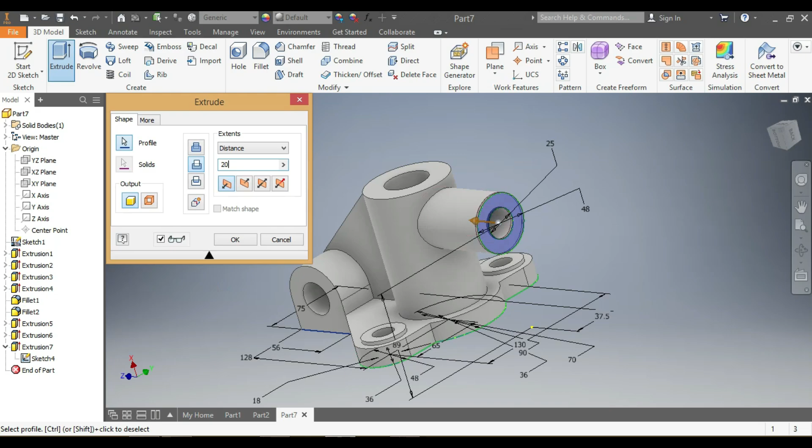So we come here. We're gonna cut that part by 20 millimeter. Okay, 20 millimeter. How's 20 looking? Looking good? No, 25 millimeter. That looks great. Then we say okay, and again 3D model again.

That circle needs to go through. Okay, so we go there. We're cutting, let's say 80. So 80, this other way exactly. Okay, so then now you finish your drawing. Everything is fine. You can even put it 88, does not matter.

So now what you're gonna do is you're gonna remove the visibility. So you come here, use visibility off. First sketch again, visibility off. So here's how your drawing looks like. Okay, you can see everything looks just okay.

So now if you want to choose the material, what you're gonna do is you come here, generic, let's go for stainless steel. Okay, stainless steel. Stainless steel looks shiny.

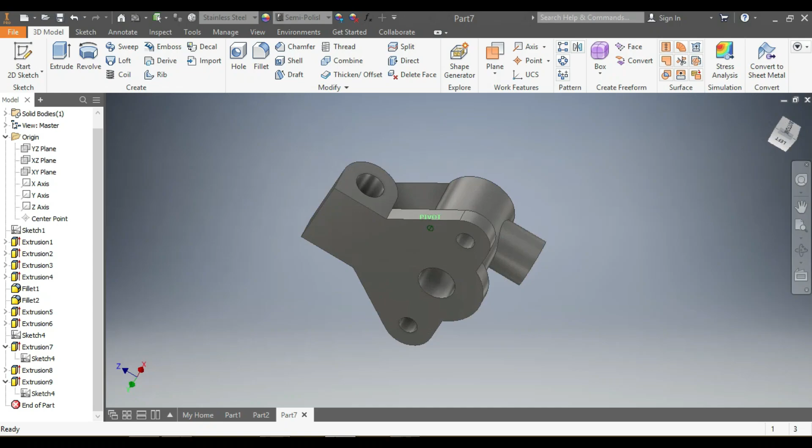Okay, so first you're gonna have to choose your drawing plane, and you're gonna go with some circles. For me, I'm gonna go with 4 circles. Okay, 4 circles. And the sizes of your circles will depend on your module, how big your module is.

Okay, so that one needs to be 261, and this one needs to be 300. This one here needs to be 120. That one needs to be 75. Okay, 75. Once I have those in place, I'm gonna come and draw my line for guidance.

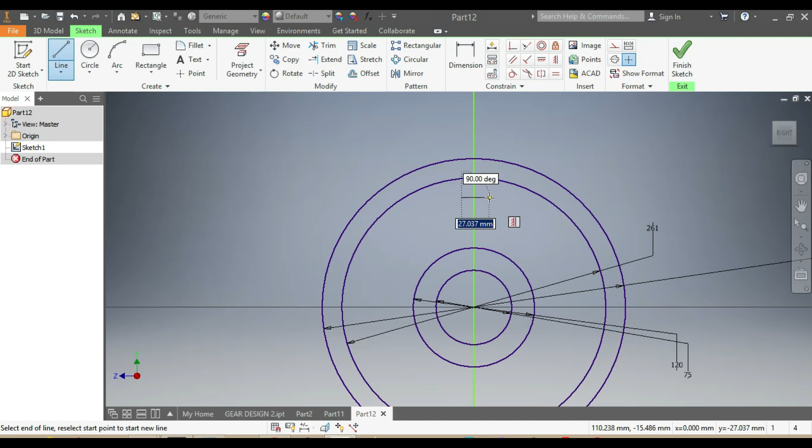Once I have that one in place, I'm gonna come for this other line. So that one needs to be 37 millimeters. So that needs to be 37, just to make sure. So this one here needs to be perpendicular to that one. Okay, it is perpendicular. And from there, that one needs to be 18.5.

Okay, 18.5. And I think again I need to draw these lines, I need 2 more. This one needs to be 22. Okay, I need to make sure that this one is parallel to this one. And that needs to be 11. 1 1, okay.

Now this needs to be equal to that one. First, again I need to make sure it's at the center, so that needs to be 18.5, so 37 divided by 2. Okay, so I need to drag back this line, and I need to drag this one up there.

Come on, up there. No, a little bit up. I need to touch the circle. Come on, I need to touch this circle. So there we go. Okay, once that's all in place, I need this one to come back here. I need this one to touch this circle up there. All right, and this needs to come there.

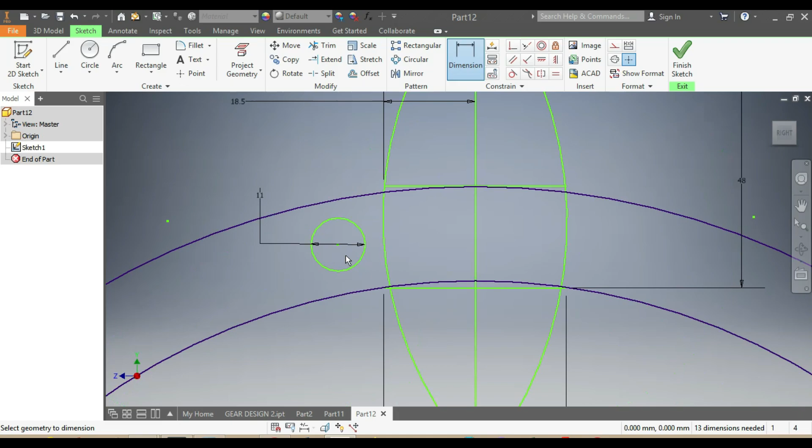So now I'm gonna drag it up until it's tangent to these two lines. So tangent there and tangent here. So I need to make sure anyway, that needs to be tangent to that one, and this needs to be tangent to that one.

Great, so again I'm gonna draw another circle on the side. So there is my circle. I want the circle to be equal to that one. Now I'm gonna drag it until it's tangent like the other one. So tangent there and here. Great, just to make sure again, this needs to be tangent to that, and that needs to be tangent to that.

Great, so once I have this in place, what I'm gonna do next is that tooth is done. I'm gonna come here and draw where the key will be placed. Okay, so there we go.

And this one here needs to be 14 millimeter. Okay, which means from there up to there it needs to be 7 millimeter. That needs to be 7 millimeter. And this one I can go up to what? Up to 15, up to 15. And I want from there up to there to go, let's say 32. Then it goes higher, okay.

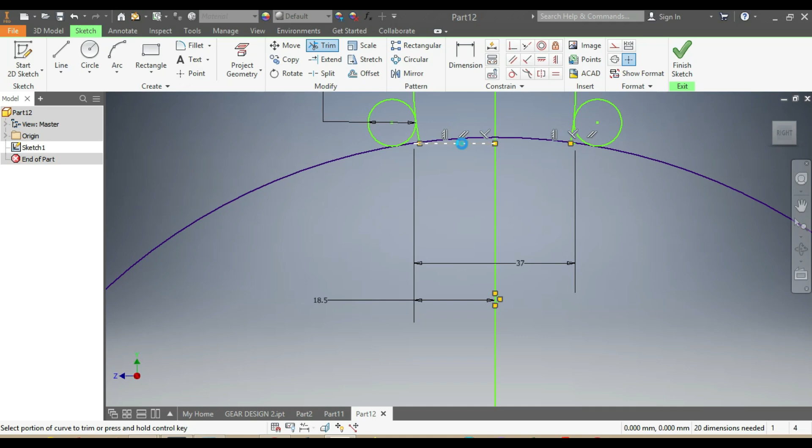Then here I'm gonna trim that spot, that one, I'm gonna trim this part here. I'm gonna trim that spot. I don't need this one. I don't need that one. I don't need that, I don't need this one. I don't need that, I don't need this one. I don't need this, I don't need that. So I don't need this one here.

And then here what I'm gonna do is I'm gonna just have to delete it. Okay, done. Here I'm gonna have to delete that spot. Done, so I'll go for trim again. So I don't need that spot. I don't need this spot here. I don't need that, yeah I don't need that. Okay, so once I don't need that one as well, I'm gonna have to delete this spot.

So once those are done, what I'm gonna do now is I'm gonna go for 3D model. So I go on 3D model there, I say extrude. So I'm gonna have to extrude this all these spots by 50 millimeter, and I want it to go both sides. I say okay, and again I go on 3D model.

Sorry, I'm gonna have first to put the visibility of my sketch on. Here, I'm gonna come and say extrude again. So I want to extrude this part here. Okay, I want to extrude this part by 90, both sides, you see how it comes, so it comes like that. I say okay, so once that is done, you can see.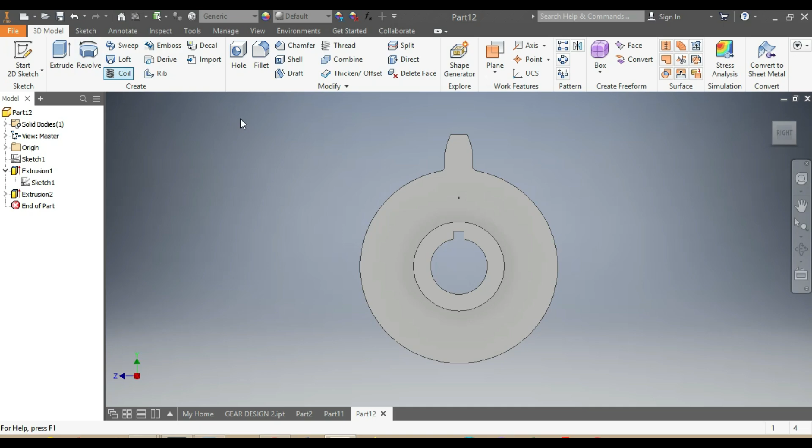Once that is done, I'm gonna go for the visibility and then say visibility off. So now I'm gonna come here and say circular, I punch on the circular. So I want to multiply this tooth, okay, I want to multiply it. So I'm gonna punch on the tooth, then I go there, then I punch on my circle. So I want them to be 14, I want 14 teeth, okay, then I say okay.

So now after I say okay, look how my gear looks like now. The next thing I'm gonna do, I'm gonna go for the material. So I want this one to be steel alloy. You see how the drawing looks beautiful, right?

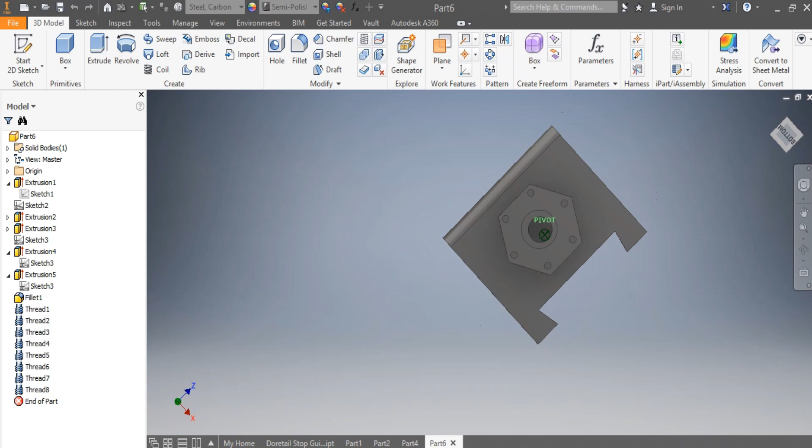Hi, today I've been given the task of drawing this dovetail guide that you are seeing in front of you. So we're going to have to see the dimensions first, and this is the sketch. You can maybe take a screenshot so we can be doing it together.

First we go and start a millimeter sketch and create. Here you can start with a rectangle. Let's say this is our rectangle that you are starting with, and let's say this is 100 millimeters for now, and this one here is 35 millimeters.

Now we have to come with this line. There is my line, and I need to make sure, as per our sketch, that it needs to be 45 degrees. So once that is 45 degrees, now I'm going to come here and trim the spots. That's one. Delete this one.

And trim this portion. Once I have that, I'm going to make sure about the dimension. This one here needs to be 50 millimeters. This is what I wanted, 50 millimeters. Then I come here and trim this portion.

I come there, I draw my circle. There is my circle, and I need to make sure that from there up to there that is 17, and now from there to there that needs to be 3.75. That's great, and once I have that in place, I come here and say extrude.

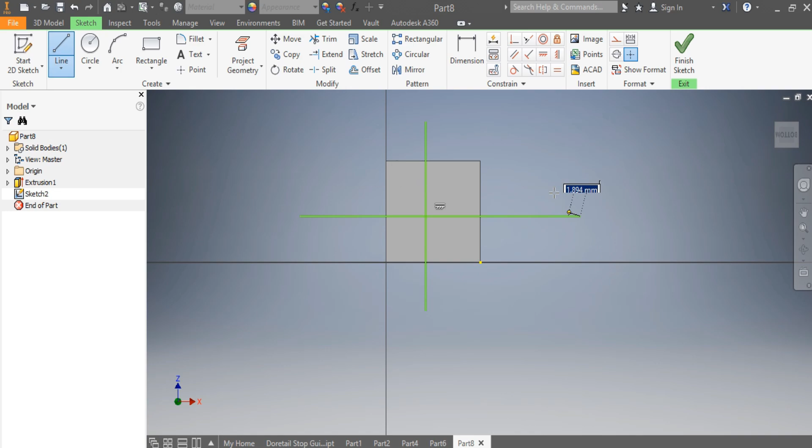Then I draw another sketch here, but first I need to have these lines here, which are going to help me a lot. So here is my second line, and now I need to make sure about the parallelism, so this one here needs to be parallel to that, and this one needs to be parallel to that. Once I have that, now the dimension: from D to V that one needs to be 25 millimeters, and from D to V that one needs to be 25 as well.

So now I come with a hexagon. There is my hexagon. Now from the top up to that one needs to be 25 millimeters.

Once I have that in place, I can now draw this. I need to have this line there as well, and I need to make sure that this one is parallel to that one. So that needs to be parallel to that - it is parallel.

And now I need to make sure that this one here is 35.188, great, 35.188. And then from D to V that one needs to be 7.406, okay, after calculation. And now let me make sure that from B up to V, yeah, that is 16.

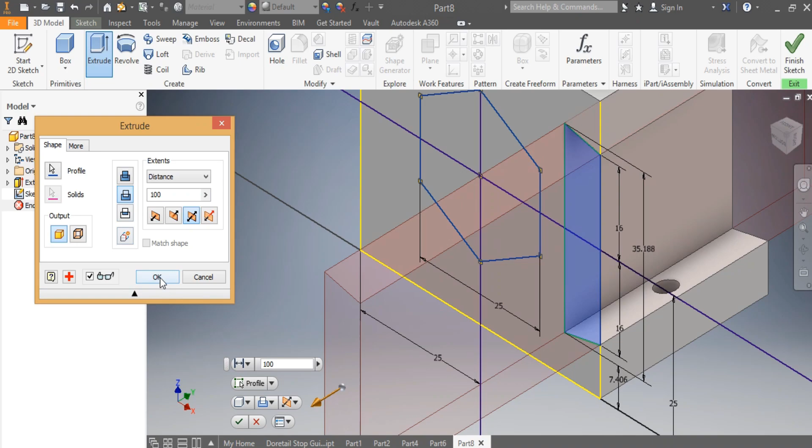Then I come here, I say visibility on, visibility on. So I want to extrude this part as well - I need to extrude this part here as given on the drawing. It needs to be extruded 20 to one side and 50 the other side. Well done, say okay.

So after that I come here and say new sketch again. I start, let me have that one in place - that's one, and this one, that will help me. So then I need to make sure that from D to Z that needs to be 25.

Great, okay, and from D up to D, now from here up to A to D, that one needs to be 25 as well. So now I come with this other hexagon. So there we go. And this one here from D up to V needs to be 20 millimeters.

So 20, great. Then I come with the circle, my first circle, my second. I start again, my first circle there, my second.